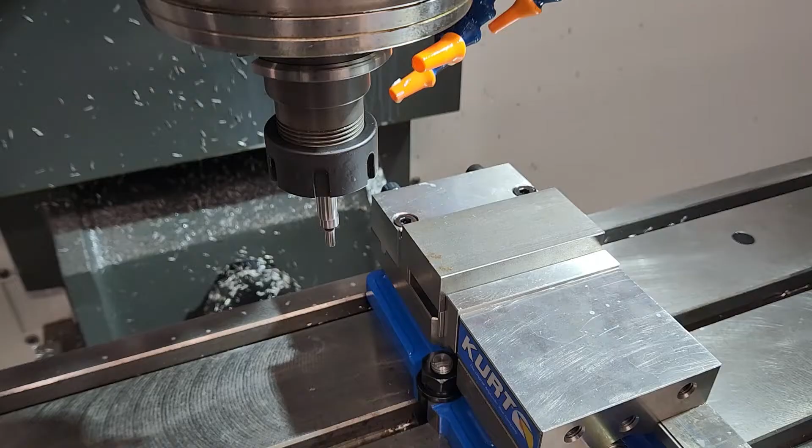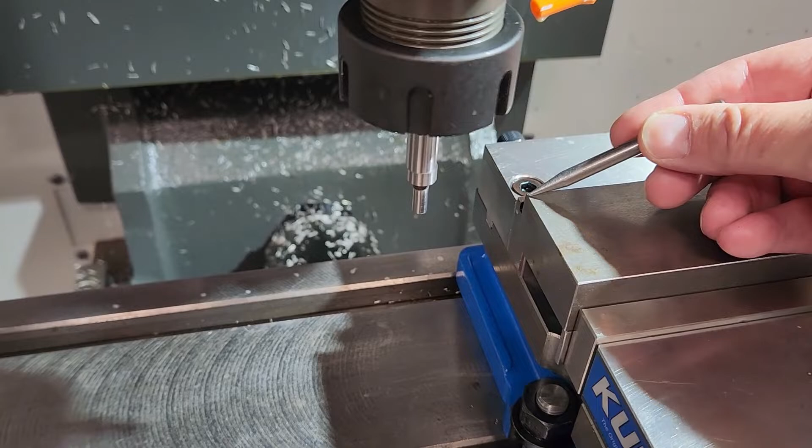Okay, so we have a part loaded into the vise. We got the vise all straightened out, and what we want to do is pick up our datum, our work offset for this part, and we have to determine first where that is. I'm going to go with this example that the upper left corner is going to be X0, Y0. So this is where we pick up our X, this is where we pick up our Y with the edge

finder. And we have the edge finder loaded in the collet tool, and I push this off to the side so I'm going to make it wobble when I start, alright? And the idea is we come down and we bring the edge finder into here, and then we stop and set the work offset.

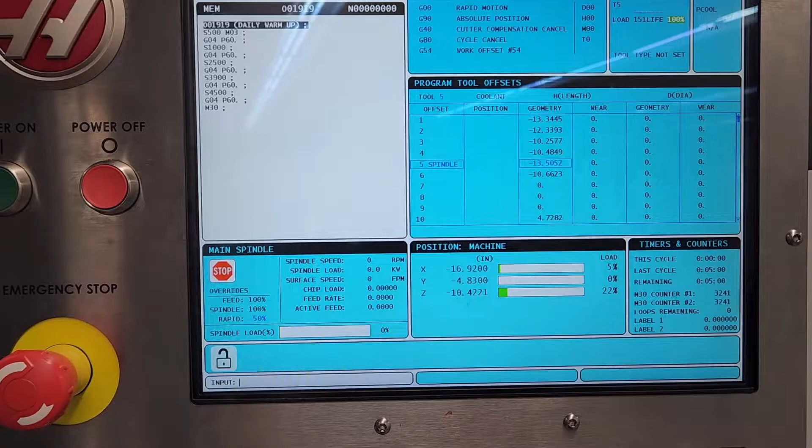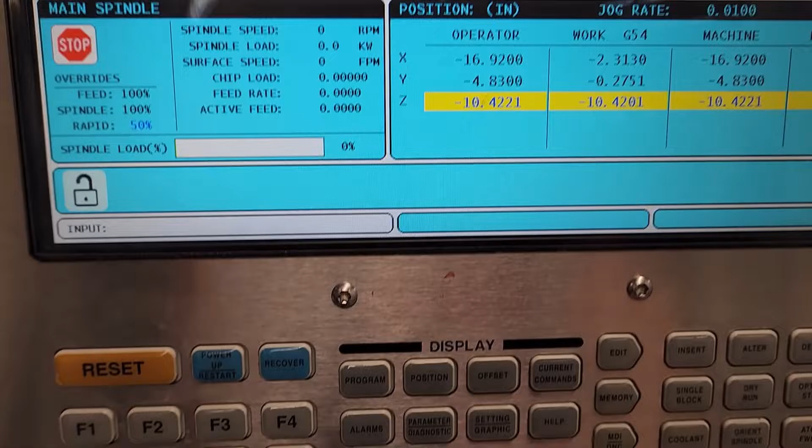Looking at the machine control, we want to make sure that we're in handle jog. So I press the handle jog button. And what we're doing is we're setting our work zero offset, the G54, that needs to be white. So what I do is I press the offset button. And now this is highlighted white. And now I use my cursor button to cursor down to G54 X. That needs to be highlighted when we go and pick up the X on the machine.

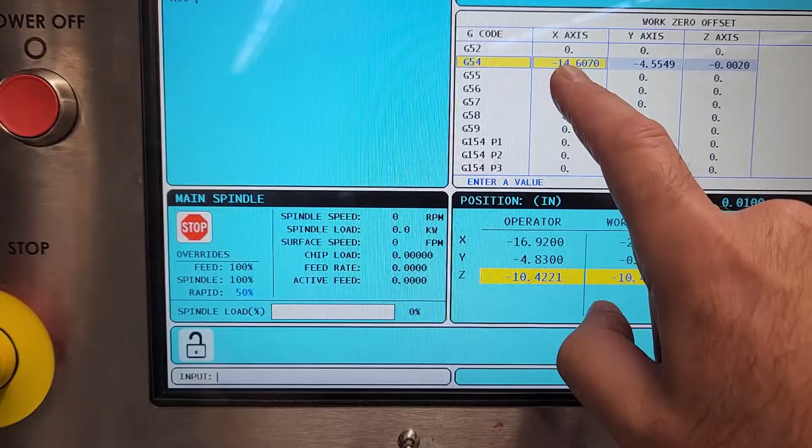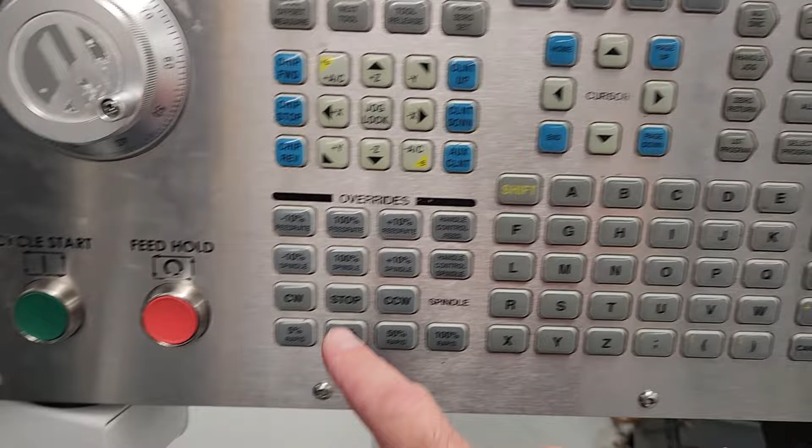We need to have our spindle running in order to do this, so I'm going to go and press 750 and then clockwise. Now you can see that's running and the edge finder is wobbling. So we're going to bring that down to hit against here and then stop it.

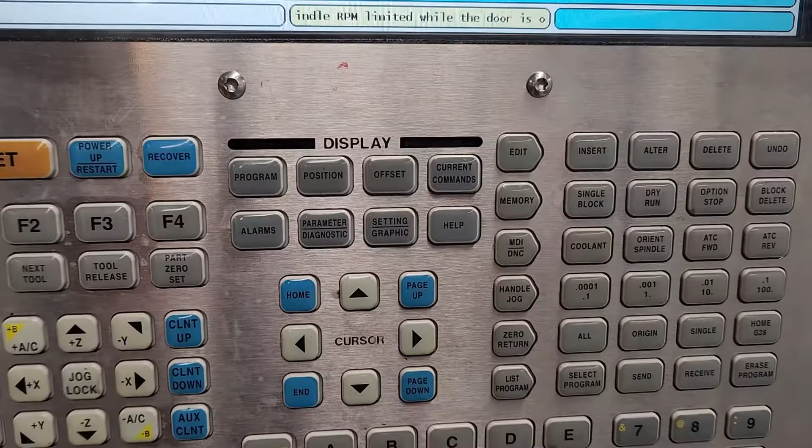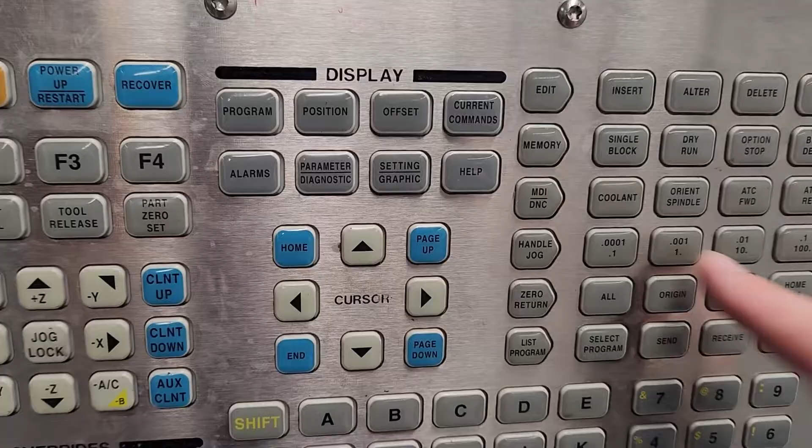Alright, so now I'm going to use my cursor keys and my X, Y, and Z on handle jog in 1,000th increment to position that edge finder near the edge of the part. I'm going to go real slow when I get close. You'll see that the wobbling slows down, not so much as it was. There we go, we're getting closer and closer. Now it's almost going straight. It's going to kick off to the side in a minute. There we go, it kicked off to the side. I'm going to stop.

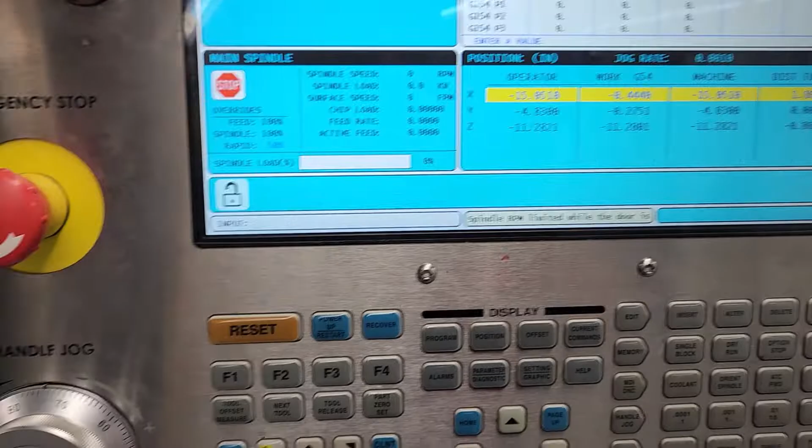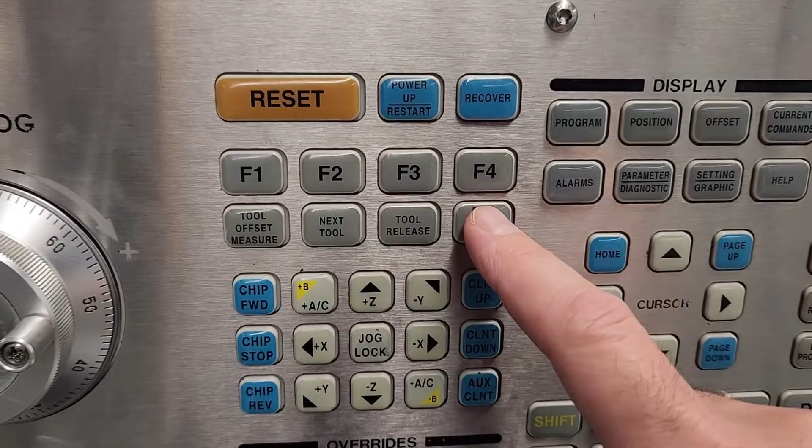Now back to the machine control with the X-axis highlighted and the G54. I'm just going to go down here. I'm going to press part 0 set. You'll see that shift when I do that. There we go. And then it jumps over to the Y-axis, so we're ready to do the same thing on the Y-axis. So now I'm going to move up on the Z first, so I'm clearing my part.

Move over on the X. Then use the Y-axis to position backwards a little bit. Come down a little bit on the Z. Go to 1,000th increments when I'm doing this. And I'm going to be just below the back of that part. And about there should be good. And again, I'm going to push that off to the side before I start it up.

Alright, so now I'm going to start my spindle clockwise again. Switch to the Y-axis and bring that in contact with the part. Nice and easy. We don't have to rush this. Alright, it's starting to straighten out now. I'm going to go one click at a time until that kicks off to the side. Okay, stop that there. Bring the Z above the part.

I'm going to go back to my control. It's highlighted on the Y-axis. I'm going to push part 0 set.

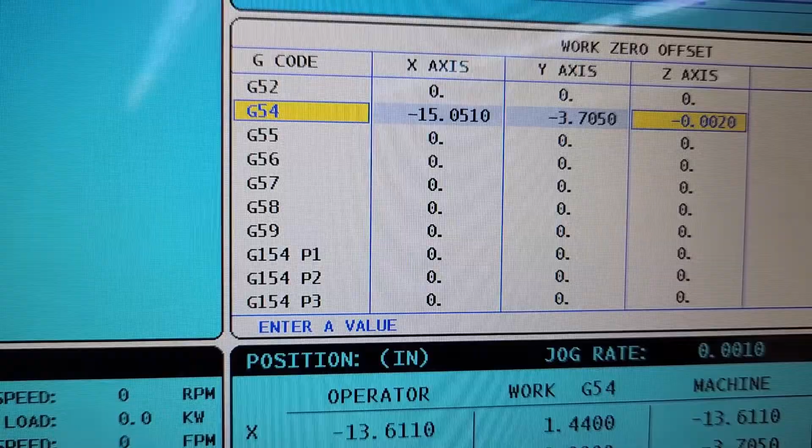And now that's all set too. In this case, the Z-axis is actually showing an offset. I want to get rid of that. I'm just going to put the opposite number. It says negative 0.002, so I'm going to put 0.002 and then enter. And then that wipes that out.

Now I've loaded in a different tool. This is just a tool, it's a pointer tool. We call it a datum finder. What it does is we're going to send this tool to X0, Y0, and it should end up right over this corner. But we're going to have to make some adjustments because that tip of the edge finder has a 0.1 radius, which I've already mentioned to you in class. Okay, and we need to adjust for that.

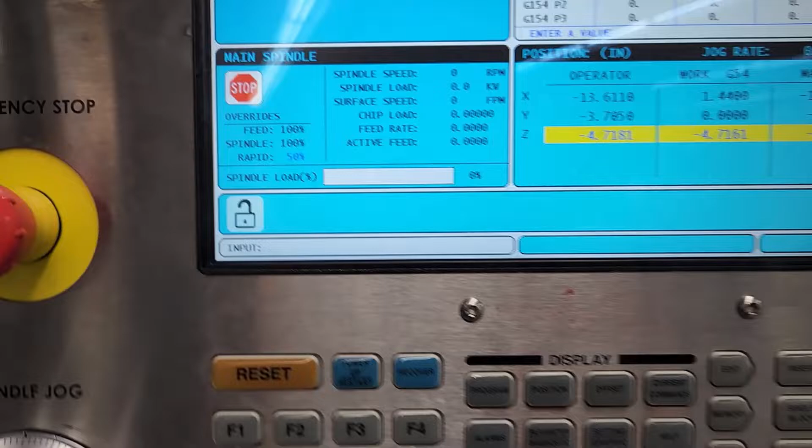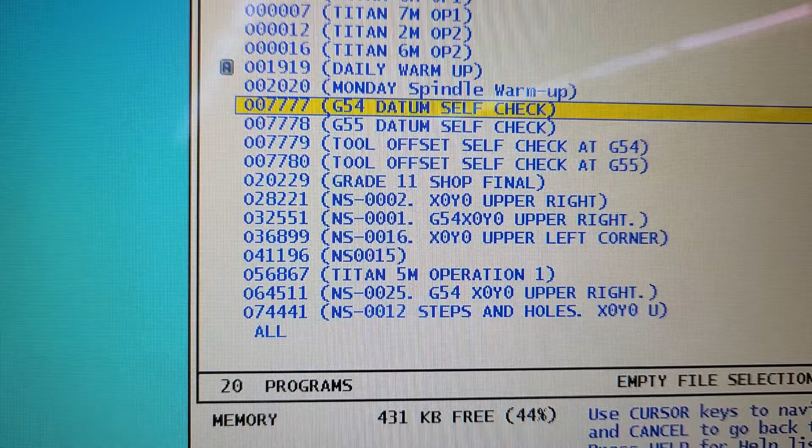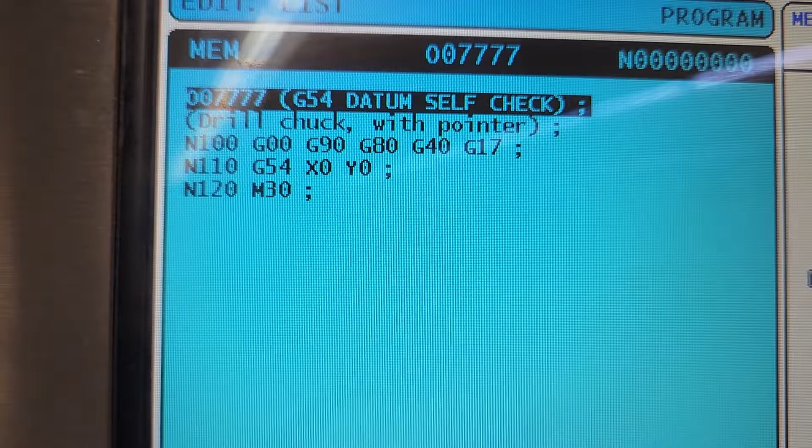So what we're going to do is we're going to close the doors, go to the machine control, and go to list program. And I'm going to find on my program something called G54 datum self-check. Alright? And when I find that and highlight it, I'm going to push select program. That makes that the active program. All that this does is it rapids to G54 X0 Y0.

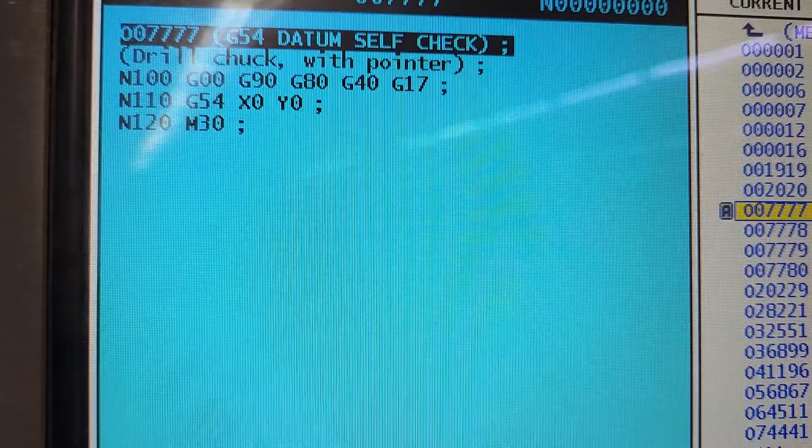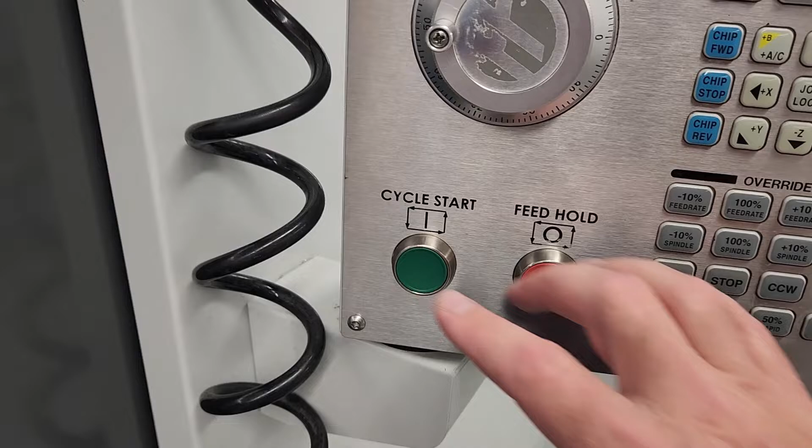All right, and then we can bring the spindle down to check with that pointing tool to see if we're in the right spot. So I'm going to go to my memory and then hit cycle start. Okay, now that has been positioned above where it thinks the X0 Y0 should be. I'm going to go to handle jog mode and bring this down in the Z until I'm just above the part. When I get close, I'm going to slow it down 0.001 increment and get down really close to the part.

Now you can probably see this. It's off in both the X and Y axis. All right, that's off from here to here and from here to here. The reason is we need to move an extra 100 thousandths that way on the X, and we got to move it 100 thousandths that way on the Y to compensate for the fact that the edge finder has a 0.1 radius.

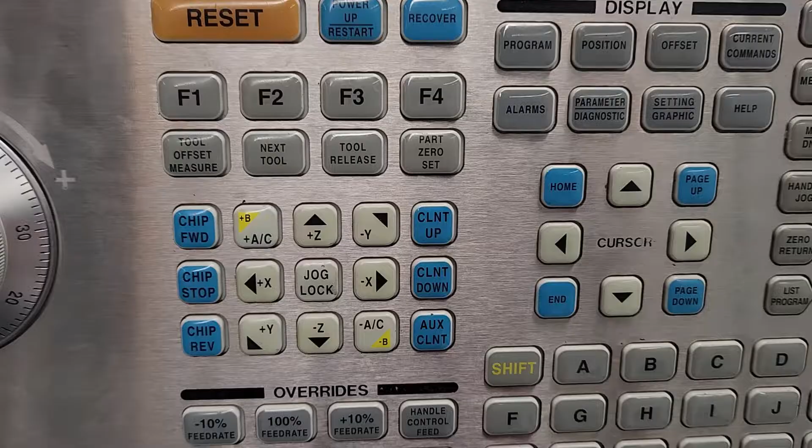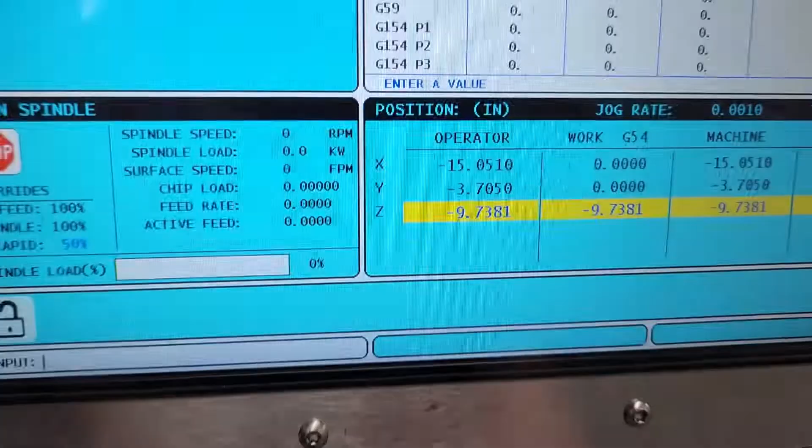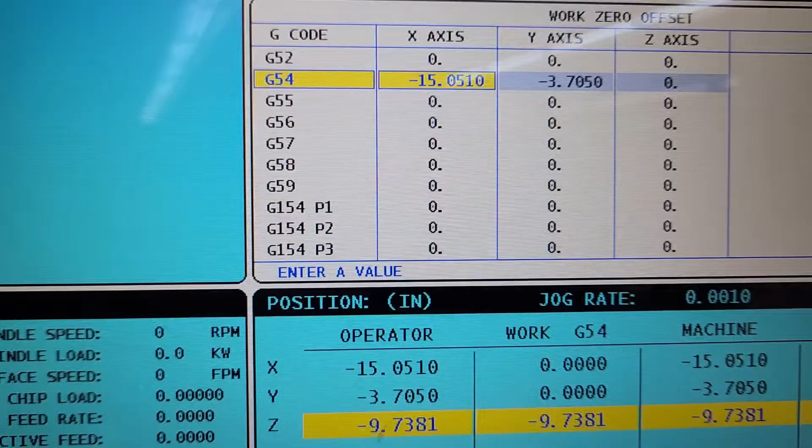Over at the control, I'm going to hit the offset page so I can highlight my X and Y. I use my cursor keys down here to go back, and here's where I'm going to make my adjustments. Now on the X axis, we are in on the negative side of X, so I have to add 0.1. I have to add that extra offset. All I got to do is down here on my keypad type in 0.1, and when I hit enter, that's going to change. Alright, that just changed by 100 thousandths.

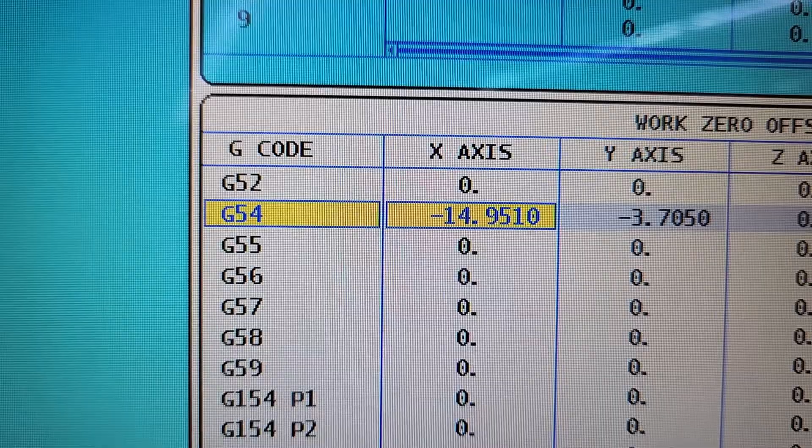I'm going to do the same thing on the Y axis. So I got to cursor over to it first, highlight the Y, and this time I got to go negative 0.1 to make the adjustment in the correct direction. Alright, hit enter, that changes. Now we can go test it. Back in memory mode, I'm going to run that same X0 Y0 program, the datum self-check, and that just moved. I'm going to open up the door and double check to see if I'm in the right location.

I'm going to switch over to handle jog. 1,000th increment on the Z. And I'm going to bring this down, and I should be right over that corner. And that lines up really well. Okay, we're right there. We don't know if it's perfect, but we know we're pretty close. A lot closer than we were before. And then we take these tools out, and we're ready to start our program.